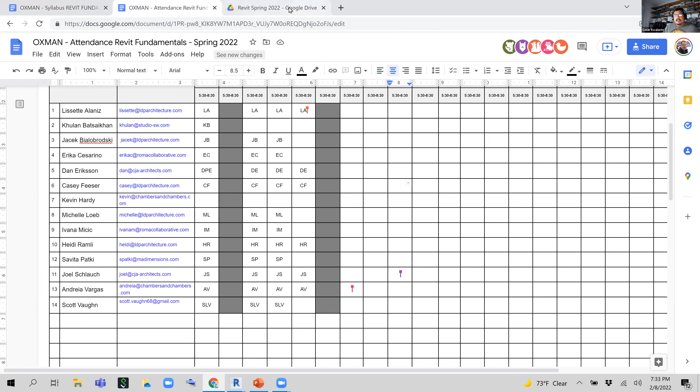Today we are going to use the data set that we left last time. I'm not sure if you were able to finish, but to give everyone the same starting point, you can go into the Google Drive, I placed a copy of the data set I created last time, called Mylla_Hytt_start2. I'm going to get the link here and post it on the chat panel. If you finished, you can continue with what you had last week, so no need to download if you were at the same point as myself.

But if you were not able to complete the massing, you could just grab the file and be at the same start point as me. This is where we left last time. We created the two conceptual representations of mass, and we called this an in-place family. In-place families are content that is created on the fly inside a project. And we created this envelope representation of the house.

You don't have to do this, but I'm just going to review this very quickly, the process again. I think as a homework, we have to create the second half of this. In the conceptual modeling, the conceptual mass is something that you create as a model in place. When you do that, you can also pick a category, which is the list of properties that you can assign to the object. I'm going to call this West.

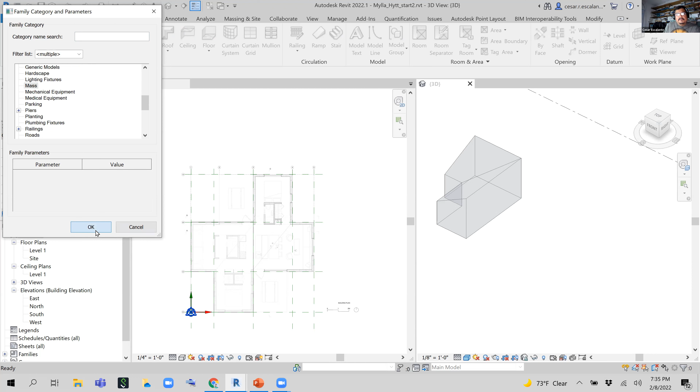That's just a category, mass. And the name of this mass is the west massing, east massing.

And again, this is how we finished last class. We are in the massing editing environment. The only way to get out of the massing editing environment is if we click this green checkbox or the red cross here.

Use the line tool to create a boundary of connected lines. Using the floor plan, I'm just going to snap to all the intersections. These intersections are the result of having working planes. When my loop is closed, I switch to the 3D view, then I hit escape. This stops placing boundary lines.

Then I select the area in 3D view and extrude it. I hit the white space to cancel, or you can just hit escape. Then I select the top face to start modifying the dimensions. I think this was 16.

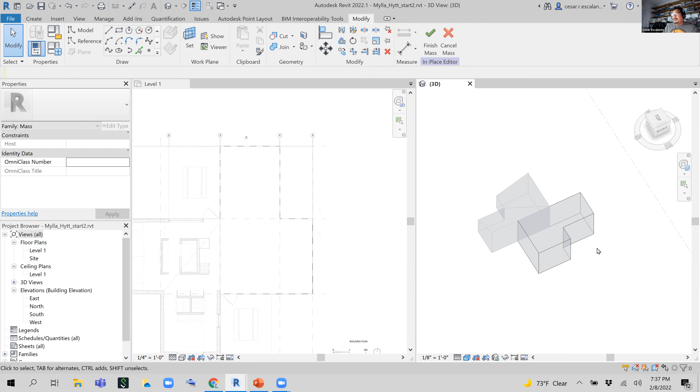In the conceptual environment, when you create a mass, you have the ability to select different elements about that mass. You can select edges - you see how I'm hovering over edges and they pre-highlight. You can select faces, a flat geometry, or you can select vertices. And what I did is select one of the edges and resize its location relative to the ground level to 9'4". In Revit, we don't have to type the feet character nor the inch character.

And then I hover over the vertice, and that vertice, I also relocate its height using these temporary dimensions. I also make it match 9'4". And when you're done, you click the finish mass, and that's where we're at.

Do we have to have massing for every conceptual house? No, we don't have to.

I chose doing this method because the way I'm going to create walls, roof, and floors is using mass-derived objects, and this is one method of creating these assemblies. But having an overall massing usually helps with some kind of analytical tools that focus on energy transfer and energy calculations. Your Title 24, for example, does not read the Revit geometry as you created it - it reads massing geometry. So when we export models, it's good to have a massing geometry so that we can work with and export to other types of analytical tools.

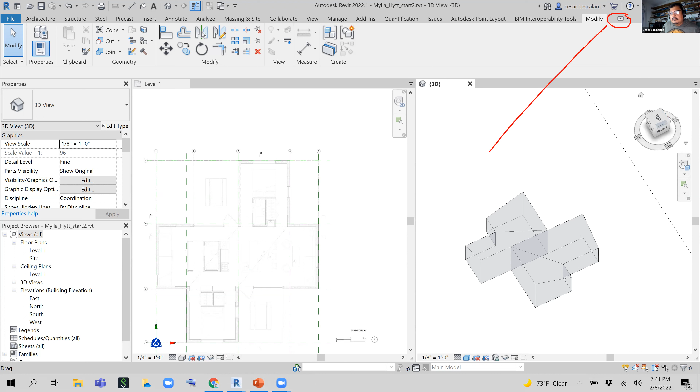Thanks for pointing that out. I'm glad you brought that up, because this may happen to anyone. I know what's happening. The ribbon has the ability to cycle across different ways of representation. If you look closely at this icon right here, next to the modify button, there's a little oval with an arrow pointing up. If you click on that, you can cycle between displaying panels, panel names, or not displaying the ribbon at all, and then display the full ribbon. So when we click the modify button, it's very easy to click this little arrow and inadvertently change the representation.

Is that what happened to you? Yes, now I can see. Yes, okay.

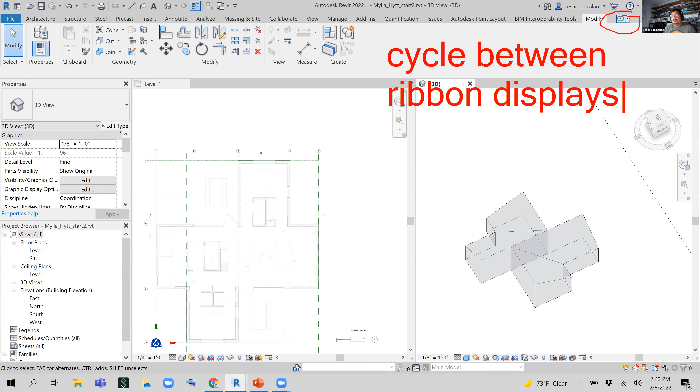Again, use this button to cycle between ribbon displays, and it could happen to anyone very easily. So if suddenly you don't see the ribbon or something's weird, just remember that little icon, that arrow pointing up in the lower, on the far right side.

Okay, thank you. Yeah, now I can see. Now I can follow you. I was like, oh my God, I cannot do anything here.

Okay, thanks. Okay, the other thing that may happen, and I'm going to describe this condition as being caught on sketch mode, trapped on sketch mode.

So a sketch mode is a temporary display in which Revit asks the user to do a certain type of operations. A sketch mode is just a way to create boundaries. And then when the boundaries are completed, we need to leave sketch mode. Usually, the only way to get out of sketch mode is to click the green arrow or the red cross.

So that's this condition. Like if I'm in the middle of creating a collection of boundary lines, and I finish, I must click the green checkbox to get out of this temporary display. And so if we don't do that and we jump to another tab, everything's going to be grayed out.

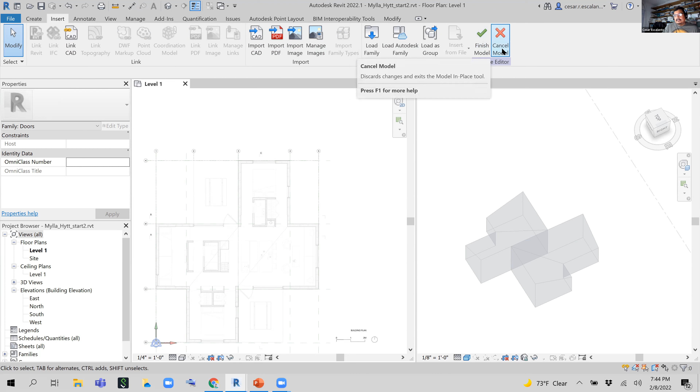And so you say, what happened with the user interface? What Cesar is showing is not what I match. The reason this is different is because I'm still inside the editing mode. In order to get out of that, I have to either cancel or finish the model. I'm going to cancel because I didn't create anything. And notice how I'm back to my full working user interface.

The same is true for, let's say, a floor. And we're going to work on floors in a bit. When I create a floor, this is sketch mode. And Revit is asking me to create a set of boundaries. But if I ignore that, I'm in the middle of editing and I go to the architectural tab, notice how everything is grayed out. If I go to the structural tab, everything is grayed out. If I go to the manage tab, everything is grayed out. And notice how there is this green undertone and a contextual tab.

While we are working in Revit, let's make sure that we don't get trapped in sketch mode. So this is trapped in sketch mode: just not being aware that you are in the middle of a sketch operation, and the only way to get out of this is by clicking the green arrow or the red cross.

Okay, everybody got the file, right? Let's see on the chat.

So Savita is asking, how do we make the views? Who wants to answer that question? How can I have two viewports next to each other? You click WT. WT, correct. You just type WT. So open the two views. I open level 1, and then I open the 3D view. And then there are tabs right now. And then to tile them next to each other, WT. Now it switched the location, but that's fine. Did that work? Okay. All right.

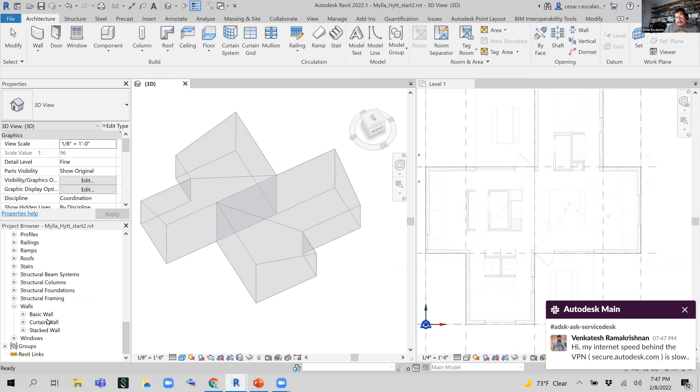There are 3 types of wall families: basic walls, curtain walls, and stacked walls. And then all these different wall types that you find in this project are provided by the project. You're not necessarily going to find these in every Revit project. It depends on how your company builds your template. Some companies decide to erase, to keep it clean.

Some companies decide to include the top 10 frequently used interior partition types. Some companies decide to build their entire collection of walls inside the template. So the variety of wall definitions inside the wall category varies depending on what template you use to get started. The out-of-the-box template comes with at least generic walls, interior walls, and exterior walls.

So let's build a wall in floor plan. Let's just pick a place on the south side. To create a new wall, you go into the architectural tab.

And then hit the wall tool. Just hit the wall on top of it. And you see, I am in sketch mode, or I'm in a temporary tab. You can tell I'm in a temporary tab because you have a green background, and you also have a tab that appears in the upper right side that says Modify | Place Wall. This is a contextual tab.

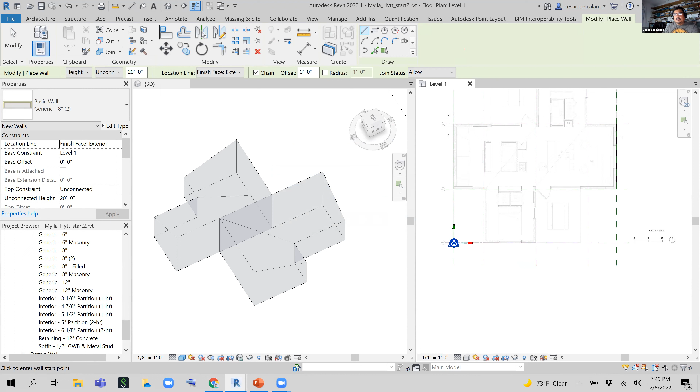So let's call this thing properly. This is a contextual tab, which are tabs that are command dependent. There are a lot of different contextual tabs. If you create a ceiling, you get a ceiling contextual tab. If you create a structural column, you have a structural column contextual tab.

The contextual tabs are ways to minimize the user interface to be a little bit more efficient, and they present you with enhanced controls to modify and create that specific command. So the contextual tab in Modify | Place Wall, these are ways to edit, create, and manipulate any created wall. So the contextual tab appears, and then in the properties, you are presented with all the different types of families that you can create using the wall command.

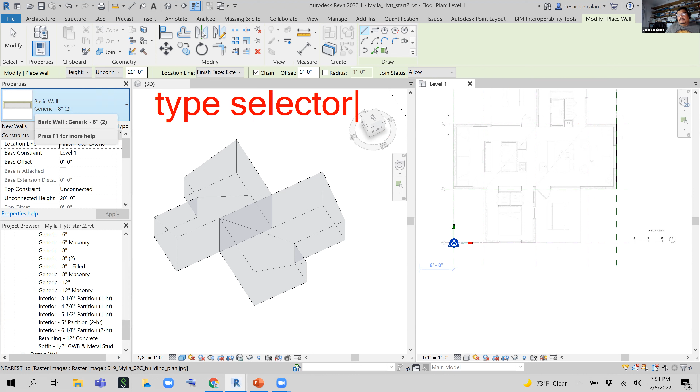And this is another part of the interface everybody must remember. This is called the type selector. So when I say type selector, always look at the upper side of the properties window. And the type selector is a way to shift options in the creation of a specific category. So I only have here element types that are part of the wall category.

There's nothing else here. If I'm in the middle of creating a floor, then I'm going to see all the floors available to me in the type selector. If I'm creating furniture, then I'm going to see all the furniture available to me in the type selector. And the type selector is also a way to swap a selected object from one family type to another family type. Okay, so when I create a wall, I pick in the type selector the wall I want. So I'm just going to pick, let's say, a generic 6 inches.

And then the contextual tab also presents you with a set of options. These guys. This is called the options bar. And the options bar, these are things you always need to look at when you're in the middle of creating an element in Revit. You need to look at the options that are going to impact the geometry. And so there's a different options bar for different tools.

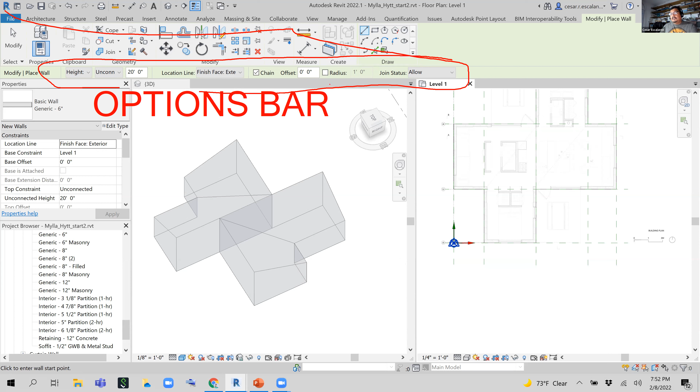And so when I create a wall, I need to understand its height, whether it's going to be connected with levels or not. It displays a location line, it displays an offset, a radius, and a join status. So let's build one wall, and then I'm going to go through these different choices. So when you create a wall, it's a 2-click operation. You start from the left, another to the right.

And then as you create more walls, notice that Revit is still remembering the wall command, and then you keep clicking and you can start creating a chain of walls. You can also close the loop. To stop walls from getting created, you hit escape. And to exit the wall command, you click escape again. And so in order to exit the wall command, you need to click escape twice. The first one is to stop placement, and the second one is to exit the command.

Again, I'm going to delete this and do it again. Wall, first click, second click, and then just keep creating a loop of walls. And then escape to exit the creation mode. So let's get a little more granular on the properties. When I create a wall, notice that Revit automatically displays for me 2 things. It displays a temporary dimension indicating the length of a wall.

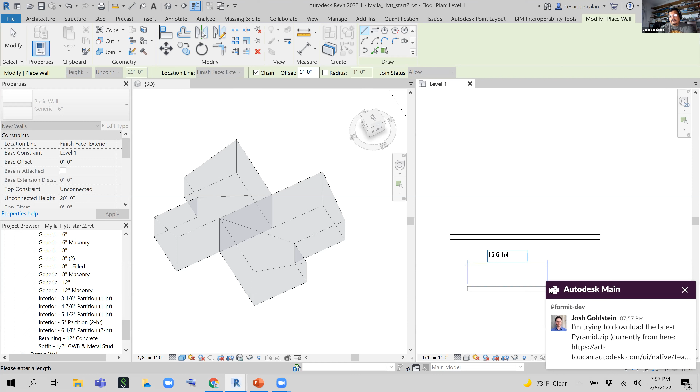You can include inches or fractions of an inch. Let me show you how. You create a wall here, and then you can type, let's say, 15 6 1/4. So on the fly, there's no command bar where you can see what you type. You have to type on the fly. So it's 15 space 6 1/4. And then you hit enter, and that's a 15' 6 1/4" wall. Escape.

You can also enter just inches. If you want a wall that is 30 inches in length, just start the wall and then type 30. But here you have to type the inch character.

You can also do math. Oh, you have to start with equal. Let me start this again. You type equal 30 plus 2, and that gave me a wall that is 32.

Sometimes we use this mental math in order to understand what it is. So again, you start the wall, and if you want to use a formula, place the equal sign, and then you go 30 minus 5 plus 2 plus 0.25. And then Revit does the whole formula for you. So these are different ways to control the length of a wall in a floor plan.

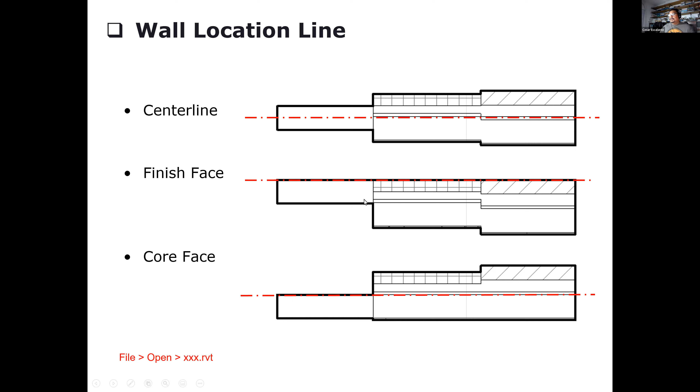So when I'm creating walls in Revit, I need to be mindful of the location line, and that is in the options bar. These are all the different options: center line, core center line, finish face exterior, finish face interior, core face interior, core face exterior. I'm going to do finish face exterior. First click, second click, escape, escape.

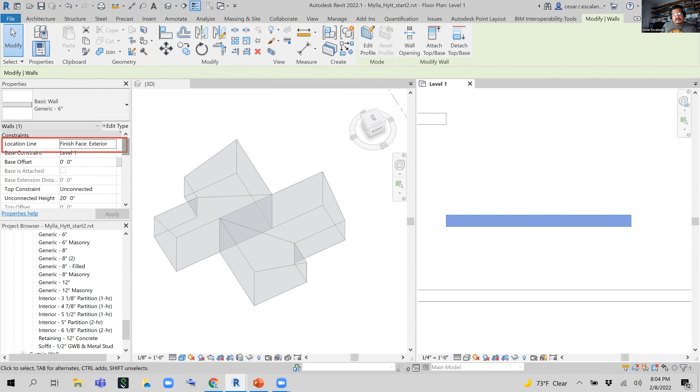The location line is something you can disclose in the properties of a wall. It's right here, location line. In a floor plan, the location line is defined by these blue grips that you see. So you can find the location line by looking at the properties, or by looking at where those grips are. I'm going to change the location line of this wall from finish face to wall center, and notice now how the grip is at the center.

I'm going to change the location line to the finish face interior. And notice now how the grips are also shifting in location. It's a visual way to communicate where that location line is. And when I hit the double arrow, the flip control, the walls are going to mirror using the location line as the axis of reflection, the axis of the mirror.

Does that make sense? So if the location line is at the center line, you might not see any shift in the geometry. I am flipping this from one side to another. I don't see any shift in the wall. So if you're building, let's say, exterior walls and you want to absolutely make sure that your facade doesn't overlap the allowable limit, then you may want to use exterior face as your anchor point. And then the wall can grow towards the interior in any size, but you're not risking your project. All right, that's the location line.

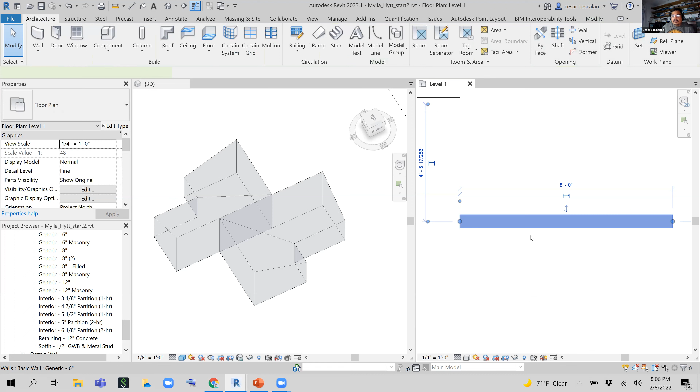Another thing you will see is that you can drag the ends of a wall. If you hit on the grip of a wall, you're gonna stretch it. Stretch it in, stretch it out. These are ways to change and modify the wall. I'm going to delete everything I have here, because I want to show you now how to create loops of walls with the similar shape.

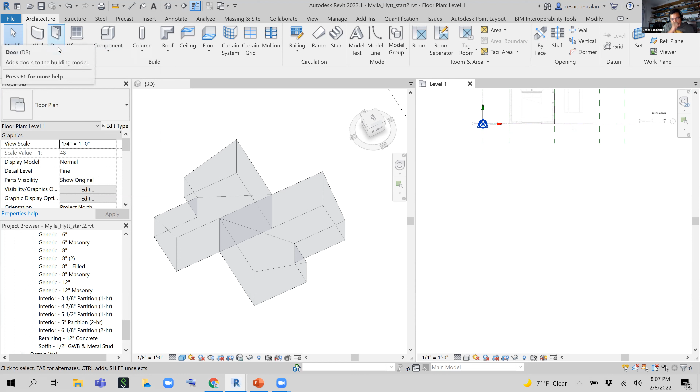So how do we create an arc wall? Well, we use draw lines, and the draw lines give me different options to draw walls that are not orthogonal. So hit the wall tool, and the contextual tab is going to display the draw tools. Here you can create line-based walls. You can create rectangular walls, circular walls. You can create polygons, either inscribed or circumscribed. You can create start-end-radius.

You can also create center ends arc, tangent end arc, fillet arc, pick lines, partial ellipse. So all these are different ways of creating different shapes of walls. The rectangle one is the easiest one. You want to try it, just hit the rectangle tool. And this is a quick, easy way of creating an office or a room.

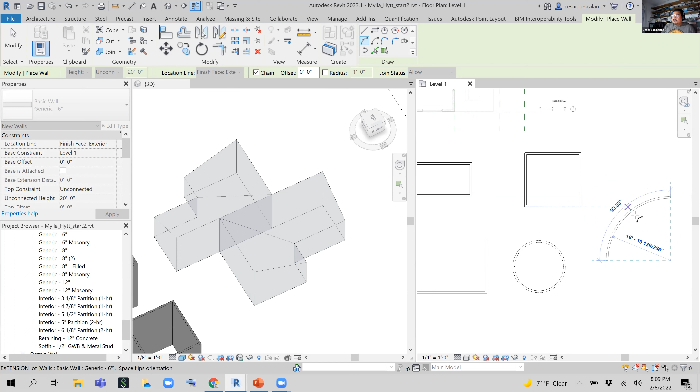You can also create a circular wall. Or you have these two methods of creating an arc wall. The start-end-radius. The first click is the first point of an arc. The second click is the end point of an arc. And then you define the radius. You can define the radius intuitively, like I'm doing right now, or you can just type the value of the radius afterwards. Select the wall, hit the radius temporary dimension, and change this to 20, and then it will change the wall for you.

You can also create polygonal walls by defining the radius of a circle. Let's do that very quick. Like if I want to create a hexagon of walls, just hit the inscribed polygon option, hit a point on the screen, and start creating and define the radius of a circle. And these, I have 4, 5, 6, and then that increase. We can also change the number of sides. I want something that is 10 sides. That's a 10-side wall. You can also create elliptical walls.

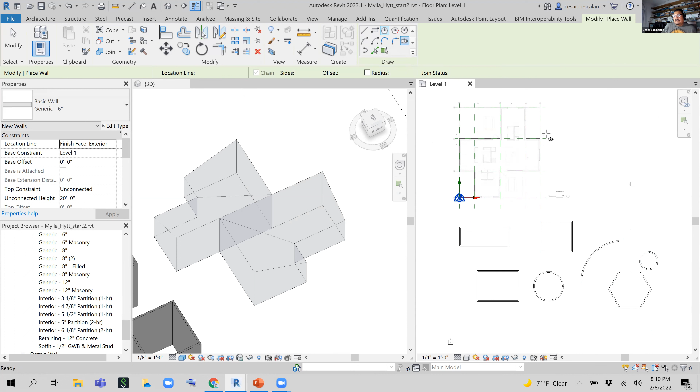This is rare, but sometimes you can create elliptical walls for feature spaces or conference rooms, or to create the Oval Office. So you create an ellipse, you define the long axis and then a point in the short axis, and that is an ellipse. All right, so I created a bunch of different walls in the south side of my project. Just as a placeholder, I'm going to delete everything. It's just so that we have a little fun in our playground.

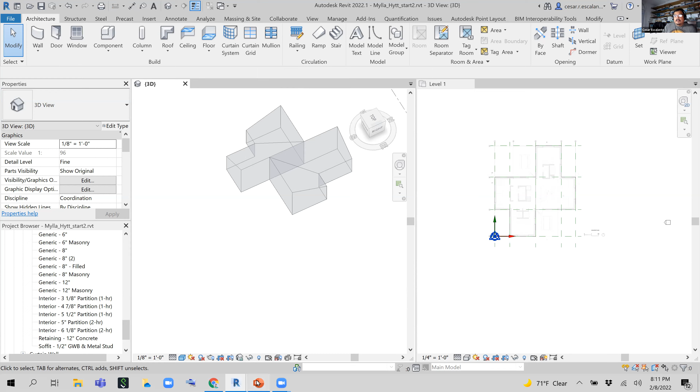All right, there's another method of creating walls, and this is using the wall by face. Well, before we get to that, let me show you what is a compound wall. A compound wall is an assembly made of walls with multiple types of layers. And as users, we have the ability to create a wall assembly that's a combination of structural layers, finish layers, and

insulation layers. When we create a wall from scratch, we usually start with a generic one, a wall that doesn't have any different type of layering information. But then we can get a little bit more complex by adding layer thickness, layer material, and performance type, or what is the function of that wall, of that layer. And so when we have a wall, and again, I'm going to do a generic one, you can access the internal properties of the wall if you look at the type properties. Type properties are right here, remember.

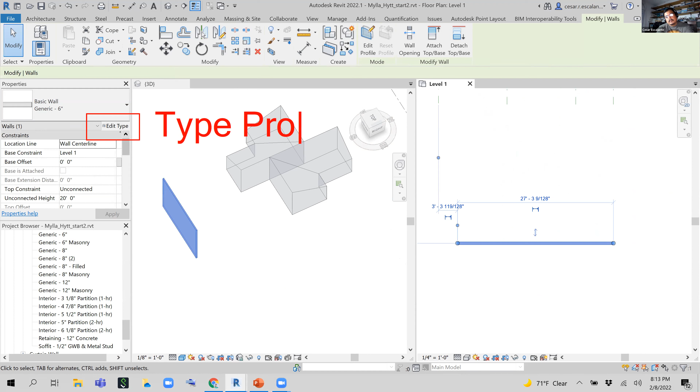And this is going to be on the test. What is type properties? Are properties that are common across all elements of the same type. And if you change a type property, you change them for all the geometries that are existing in the project that are of the same type.

So when I edit the type properties, you see this type properties dialog box. And again, these are walls. And remember, this is the way to find if something is a system family or a component family. And it just tells you this is a system family. And what that means, you cannot save it as an external file.

This is the type called 6 inches. And if you click this drop-down list, these are all the list of types available in the project. These are the type parameters grouped by functions. And if I want to create a new type based on an existing one, we need to follow a very simple rule. And this is important, so I'm going to type it.

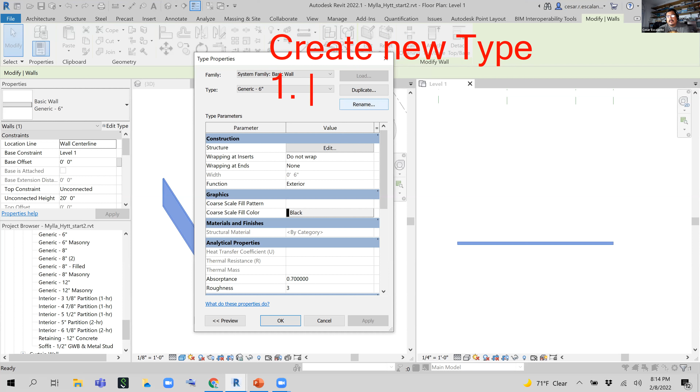This is create new types. Step number 1, duplicate a type. Step number 2, rename it. And step number 3, change parameter values. It's important to create new types so that we don't affect or impact the definition of something that's already existing in the project.

And so if I want to create a new wall type based on an existing one, we start with a placeholder. In this case, my placeholder is the generic 6 inches. Then I edit the type. And then apply the 3 rules. Duplicate it, rule number 1. Rename it, rule number 2. I'm going to call this custom wall. And rule number 3, change parameter values.

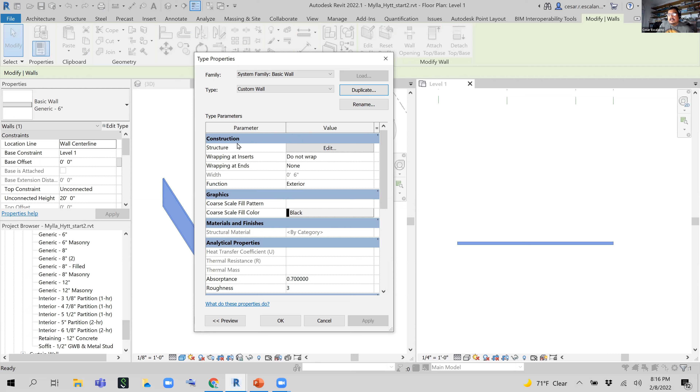So I can start editing the values of this wall type without impacting the one that's already living in the project. So let's open the structure edit button. And so don't be scared. This is a tabular representation of wall layers and wall properties.

And so right now, this wall is made of a single layer that is 6 inches in thickness. That layer plays the role of a structural material. It has a structural function, and it doesn't have any material. The material is defined by category.

Okay, so I'm going to select this wall, and then I'm going to edit the type, and I'm going to duplicate it. No, I'm going to select this wall, and I'm going to swap the type. So let's pick one of the more sophisticated ones here. Let's use this exterior brick on metal stud. And notice how now the wall starts to project some internal layers.

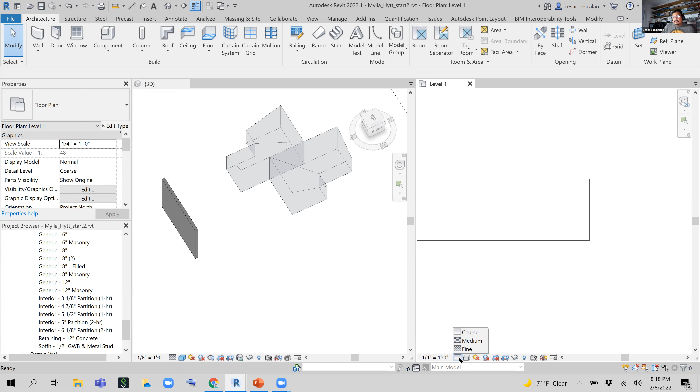And the layers inside a wall can be switched on and off using this coarse view. So if I switch the property to coarse, you don't see anything. And this is a good wall representation for overall floor plans, right? If we're doing detailing or we're doing wall sections, then we want to disclose the layers by swapping this control to fine. And then when this is fine, it will expose all the internal layers.

So I'm going to leave it as fine. Detail level, I'm going to leave it as fine. So just select the wall. No, select the view. This is a property of the view. And then select fine. To access the internal configuration of this wall, edit the type. And then in the structure, hit the edit button.

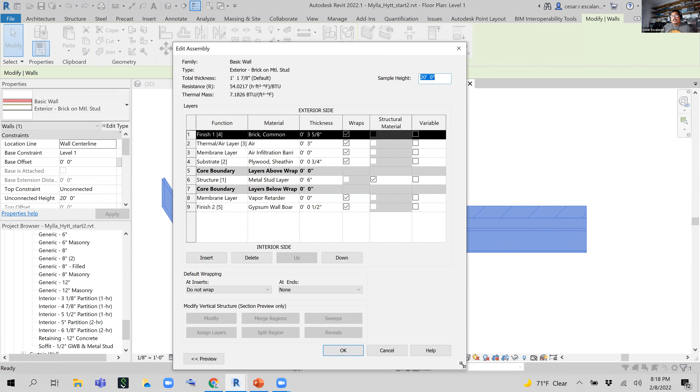And this is a little more complex than the previous one, right? So let me explain what this means. This is a display of layers from the exterior side to the interior side. And you can see that it says exterior here and it says interior here. So on floor plan, I'm going to find the double arrow on the exterior side. Then these layers are sorted by number, layer 1, 2, 3, 4, 5.

That's the first column. Then we have another one called function, another one called material, another called thickness, and then another column that's called wrap, whether it's a structural material and whether it has variable thickness. The easiest column to understand is the thickness. That's the total thickness per specification. The other one that's easy to understand is what is the material.

We haven't talked about materials, but know that if you hit the material cell and you hit those 3 little dots on the right side of the material cell, you can launch the material library, which displays the list of materials available in the project. I'm going to have a full class dedicated to materials, so don't worry about that now.

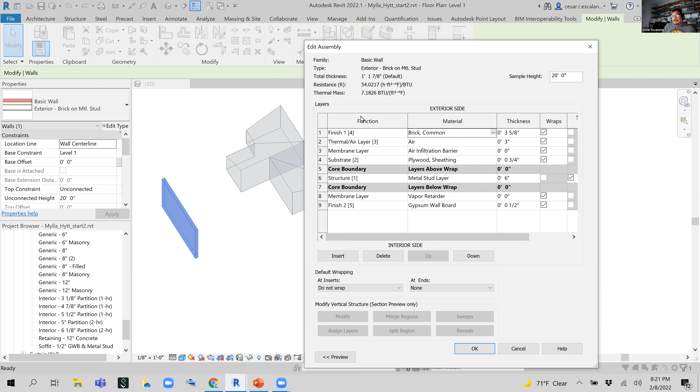These different functions, if you hit the function cell, you can swap the function by choosing another option in this drop-down menu. But notice there is also a number in brackets. This number here is called the priority number.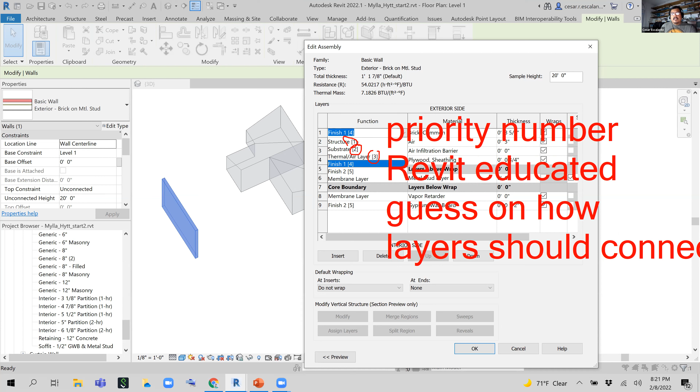And the priority number is Revit's educated guess. It's not always perfect on how layers should connect. Let me show you that in this slide. So in addition to the function of the layers, we also have priorities. And priorities are Revit's way to understand how corner conditions work.

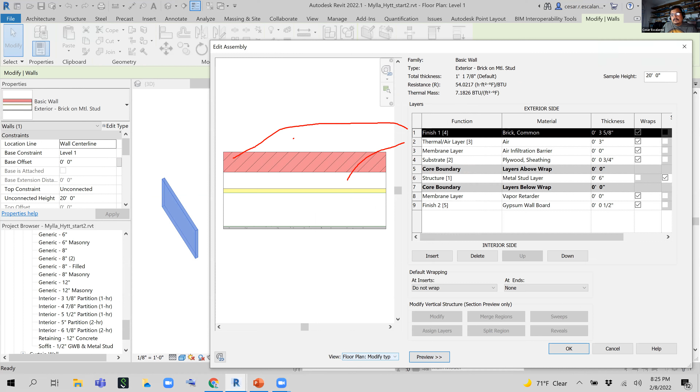So this is the finish. The thermal layer is this one. Then a membrane layer, knowing that membrane layers are like air infiltration barriers, and they are so thin that they don't need to be geometrically represented. So they have a typical thickness of 0. Whenever you use membrane layers, they have a 0 finish.

Sorry, this is the membrane layer, it's paper thin. And then I have this yellow one, that's the substrate, that is the plywood. And then row number 5 and row number 7, those are not materials, and they don't have any thickness. These are the dividers inside.

These are like ways to indicate to the user, or to Revit, that any wall that is between the layer above and the layer below is the structural core. And remember the core location line, that's how we define where the core is. So core boundary, wrap above and below, these are just visual dividers. They have nothing to do with layers. They're just visual dividers indicating that anything in between is a structural core of the building.

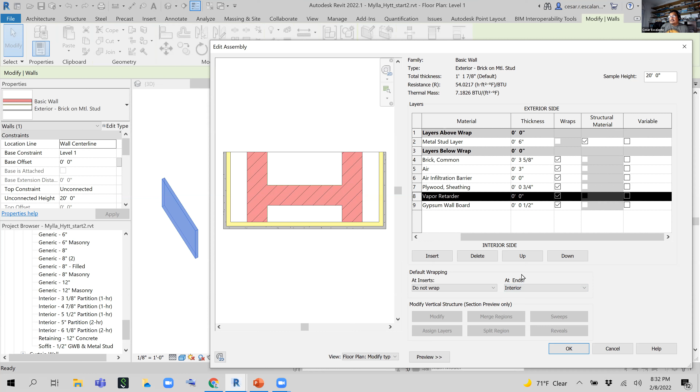So let's say this wall is going to wrap at the ends, and I'm going to do interior. What's happening is that everything that has a checkbox in this column is going to turn 90 degrees at the end cap. Obviously, that's not the way to build a wall, right? So maybe you change this to none. Or if you want to exclude certain layers, for example, I don't want the brick to turn at the ends, so I disable the ability to wrap, and then I wrap the exterior and the interior.

Interior means the interior layers, the lower ones, wrap towards the exterior one. If I do the exterior, it's the opposite. The exterior is going to the interior, but there's nothing to wrap because there's nothing above the core.

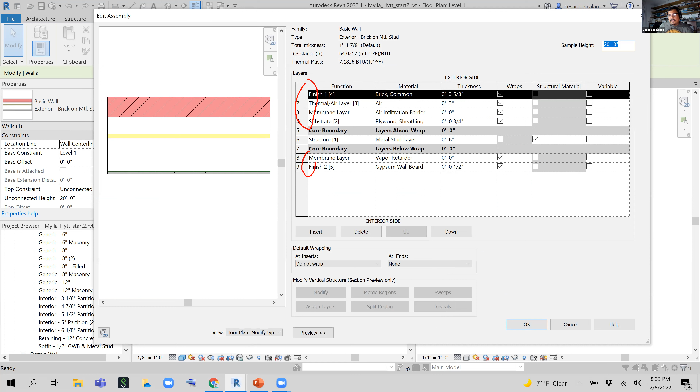So let me cancel this and go back again. I'm going to select edit the type again, and make this a little bigger again. So everything that is above the core boundary, these are the exterior layers. These are called the exterior layers. And everything that is under the core boundary, those are the interior layers. So these are this, and these guys are this.

So when I wrap and I tell Revit wrap the exterior ones, notice how the exterior layers wrap into the interior ones. Or I can do the opposite, the interior ones wrap into the exterior ones. I almost never use this, to be honest. I might use this in cases where I want to render and make sure the end caps display with the appropriate material, but for the most part, I keep this as none.

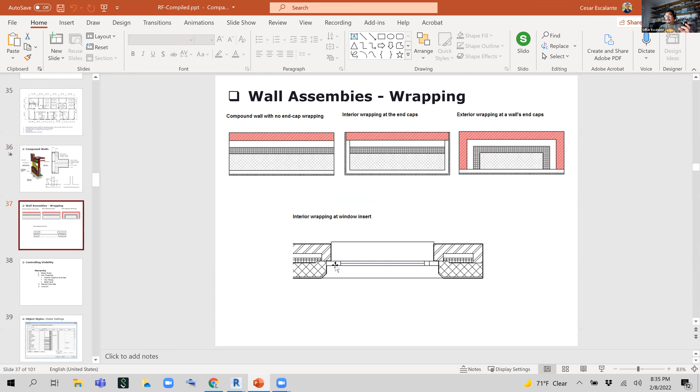The wall wrapping at inserts means the behavior that's going to happen at doors and windows. Here's an example, this is the way the layers behave at a window location. In this case, it's both, meaning that both the interior and exterior wrap and they meet at the location line of the wall. So the same thing happens here. If I select both on the inserts and place a window, I don't have a way to place a window in the preview, but both the interior and exterior are going to wrap in a window condition.

Again, this is a little more advanced, but for the most part, we don't let walls wrap, so do not wrap and do not change the wrapping at ends. I have a question, Cesar. Yeah. So does Revit assign the priority always from the core to the exterior and then comes back to the interior?

A good question. The rule of priorities is that the numbers grow from the core to the finishes in an incremental way. So you can have 1 here, the structure is always 1, and then you can grow to 2, 3, 4, but you cannot have 1, 2, 1, 3, 1. Then Revit's going to get angry. Let me show you.

If I change the priority number in a non-incremental way, I'm going to change this brick to structure, and I hit OK. Revit gets angry. It says layer function priorities: the priority numbers cannot ascend from the core boundary to the finish face.

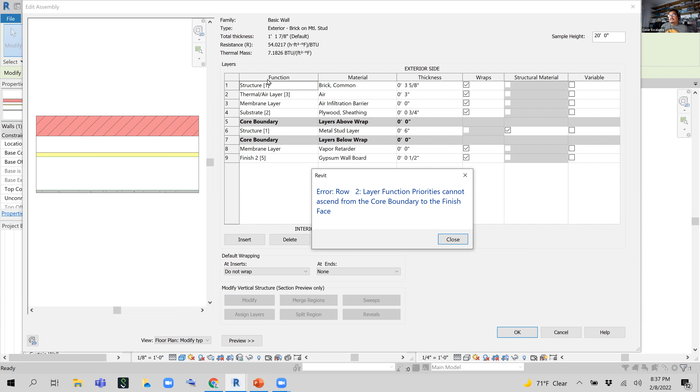So they have to go from 1 to 5, but you cannot alternate. You can also have the same value. For example, I'm going to change this to 3, and I hit OK, and it accepts it because this is the same function. But you cannot combine them - the rule is that from the core to the exterior or interior sides, it grows incrementally, but you cannot alternate them.

The other thing is that finishes have 2 priorities, 4 and 5. If the finish is the same in interior and exterior, I leave the function the same, like priority number 4 and priority number 4. If they have dissimilar finishes, like this case where I have gypsum wall on one side and brick on another, then I assign 1 to 4 and the other to 5.

The membrane layer doesn't have a priority number because it can float anywhere - it depends on what climate you are in. So I can move it up and down and it's going to work. Revit won't complain about membrane layers, just the ones that have a priority number.

Any questions about how this works?

I have a question - are the functions preset in Revit? It is preset, and I only have 5, well 6 if you consider the membrane. It's sort of a limitation, but when we export the walls to GBXML, the format used by Title 24 analysts, this matters. This is important for them, and I think these are the basic parameters of information needed to make some energy analysis. That's basically the core of it.

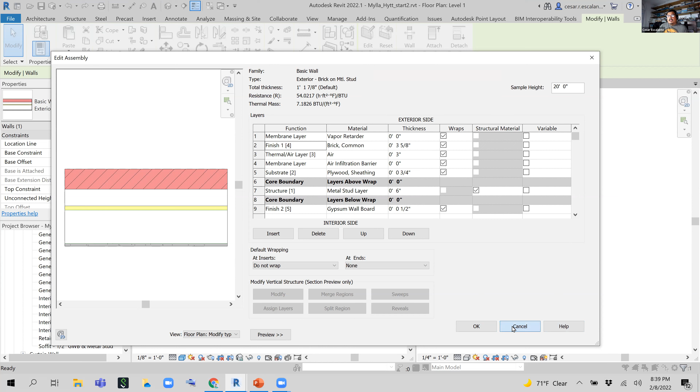Okay, I'm going to cancel here. I wanted to show you how walls work. Let's go back to Mylla. Let's see - okay, I have like 20 more minutes, 25 more. Let's do the walls and the roof and we'll be done. So if you want to watch me, okay, I don't need this wall, I'm going to delete it. This was just for a demo.

I'm going to zoom to the floor plan on my level 1. I created a wall type for you already that represents a veneer. Let me just show you that first - I'm going to create a wall here. You don't have to do this, I'm just showing you the wall type I created for you. Inside here, there is a generic.

And then that is a wall that has the following layers. It has - oh, is it this one or... yeah, I think that's the one. Okay, I'm going to select this wall and edit the type. It's called generic 8 inches 2.

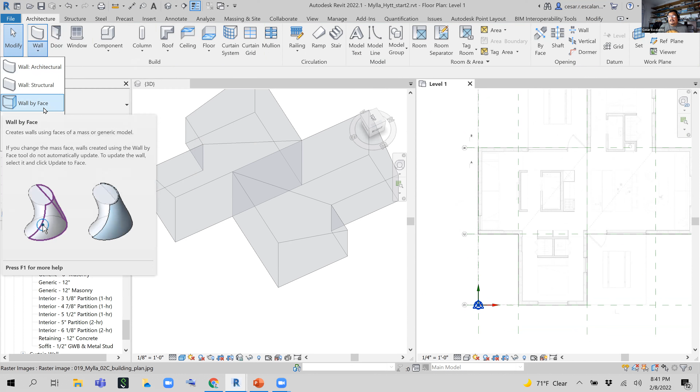All right, so we'll delete this. To create a new wall by face, you've got to hit the drop-down menu under the wall, and you're going to see wall by face. A wall by face is a way to create a wall shape based on a mass object, and this is a mass, right? So we created this object already.

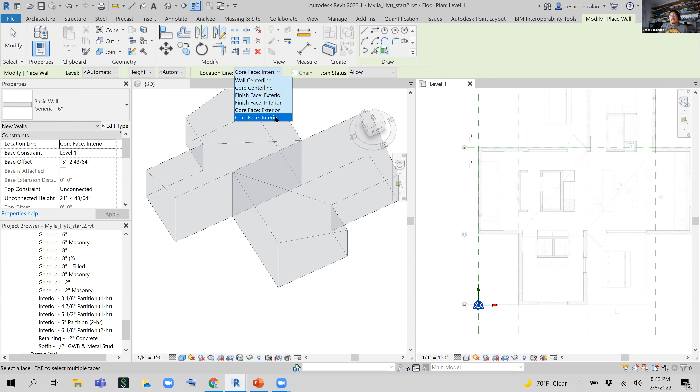So wall by face - before you click any face in the model, check the options bar, because it's important to set the location line. The location line is the way in which the wall is going to be created relative to the face of the mass. So I'm going to choose core face interior, which means the core of the wall is going to be aligned with the face of the mass, and that's because the core needs to align with the boundary of the floor.

So I'm going to do core face interior, and then I'm going to select a face.

And notice in plan how it works. So I picked the wrong one, I picked the wrong side. So I'm going to undo it. I think the one I need is the core face exterior. And then the type I'm going to choose is the generic 8 (2). That's there. And then I pick the face, and there you go. That's how my wall is working.

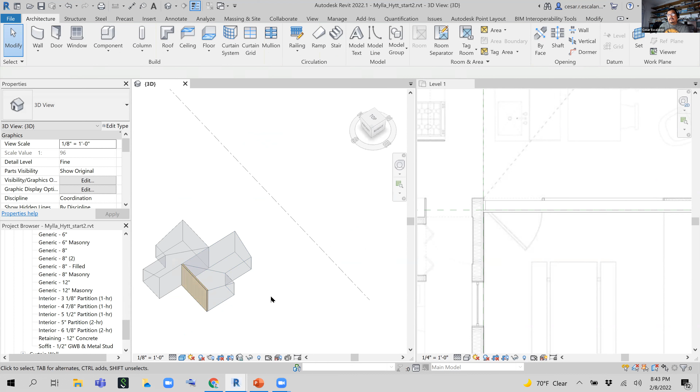And then the wall is going to inherit the shape of the mass face, and it's going to have the boundary sketch lines of that mass. And it's easier to model. You don't have to worry about the top, the bottom, etc.

So let's repeat that. I'm going to go wall, this drop down, and select wall by face. That's step number 1. Step number 2, make sure you pick the location line core face exterior to align the face of the mass with the core of the wall.

And then in the property window, pick the generic 8 with 2 in brackets and select the face of the wall, and just keep clicking. I'm going to use the shift. You can just rotate the model. You can also use the Q and keep clicking the walls to create the rest of the geometry.

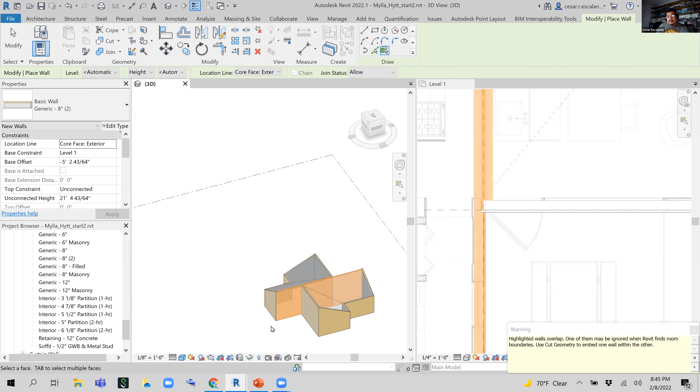Now for the demising wall right at the center, one of them is going to overlap, and that's fine. We're going to fix that. You see, it gets angry. It says it's overlapping, but we're gonna fix that. Again, what I'm doing to rotate that is to click Shift and press the mouse wheel. And then I continue clicking. Click, click, click.

And if you look at the floor plan, I want to switch this to transparent so that we can also see the image wireframe. I'm gonna focus on the detail in this corner condition. Notice how the exterior finish is outside, and the core is sitting on top of the floor slab. And that's usually how we work on this type of construction.

Okay, any question? Any hand? No. Where did you do the transparent thing? Oh, here I switched to wireframe, and that makes everything transparent. If I leave this to hidden line, it's solid.

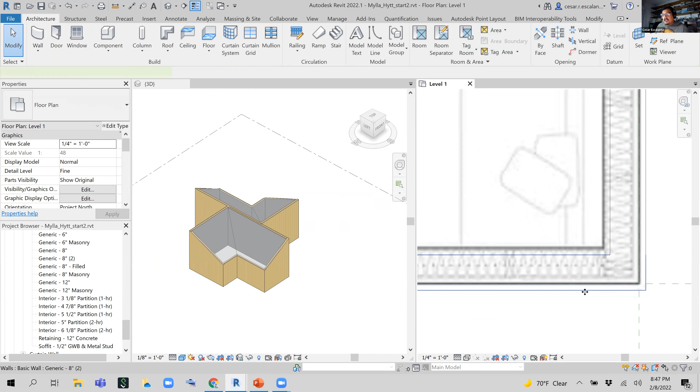Now I'm probably missing a layer for my wall type. So right now I have a core and I have an exterior finish. And if you look at the Mylla pictures, and you look at the interiors, all the interiors have this plywood applied on top of it. And so right now I only have the wood core, but I don't have the finish of an interior. So I'm going to modify the wall to include a plywood layer. So you all with me here? Did you finish doing this?

All right, so what I'm going to do now is to add a new layer to the wall type definition. I'm going to name it correctly as well. Because notice how the interior of this space has this dark color, which is just a generic representation of the core. So select a wall, one of the exterior walls, to get started. Then edit the type and click the structure edit button.

And what I need to add is a new layer in the interior side that's made of plywood, and it's going to be 1/2 inch. So I'm going to select row number 4. I'm going to insert a new layer. When you insert layers in this dialog box, it's always going to insert it up. There's no insert down, unfortunately. I wish there was. But then I'm going to use the down button to move it in place.

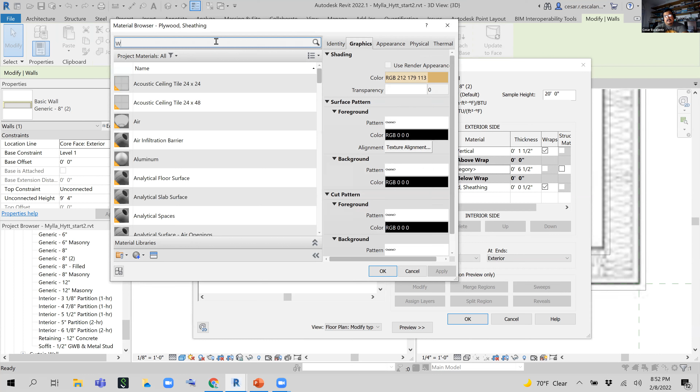And the other thing I'm going to do is in the structure; I know this is wood construction. Right now it just says by category, and that's why it has that gray color. I'm going to click on the structure and those 3 little buttons next to the structure cell, and I'm going to look for stud. You can search in the material browser in the upper left side on the search cell. You can find stud, and there's only metal stud. Let's say wood. And in wood, we have softwood lumber.

The reason it's important to define all the materials as needed, well, there are 2 reasons. First, so that it renders well. And second, it has the appropriate physical and thermal properties associated with the materials, which are important for analytical purposes. So softwood lumber has all these: specific heat, density, emissivity, permeability. Maybe this is not important for an architect, but if we're going to transfer this information to somebody else, to an energy analysis or a Title 24, they may or may not use this information, and that information is baked with the material. So I'm going to select softwood lumber, hit OK.

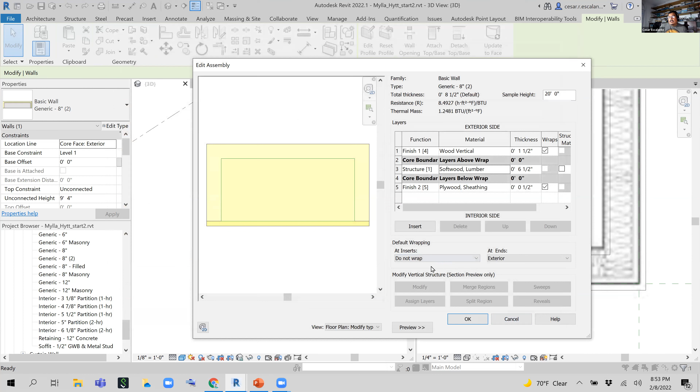And I have everything as it should be. I have a finish that is plywood sheathing, 1/2 inch, a structure that is softwood lumber, 6.5, and a finish that is wood vertical, 1.5 inches. And then hit OK, hit OK. And now the interior finish matches the image I have of the Mylla house, which has this nice finish. When I render, it's going to look like that.

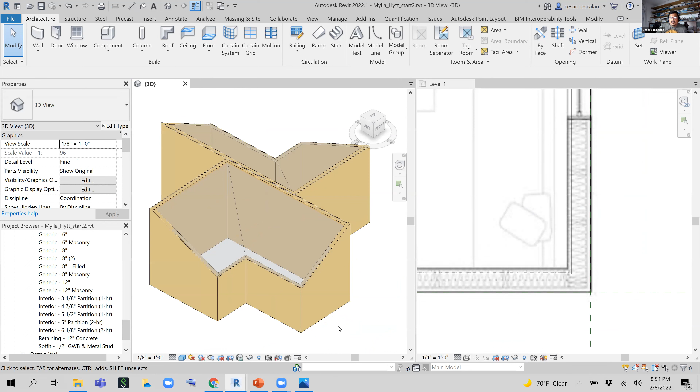Okay, another thing you should look at is these corner conditions. I think the corner at the edge is very clean. But in Revit, there's a primary wall abutting a secondary one. But that is a behavior that we can override. So if you're with me at this point, let's take care of these corner conditions. If you want to watch me first, I'm going to explain what a corner condition is, and then we'll do it together.

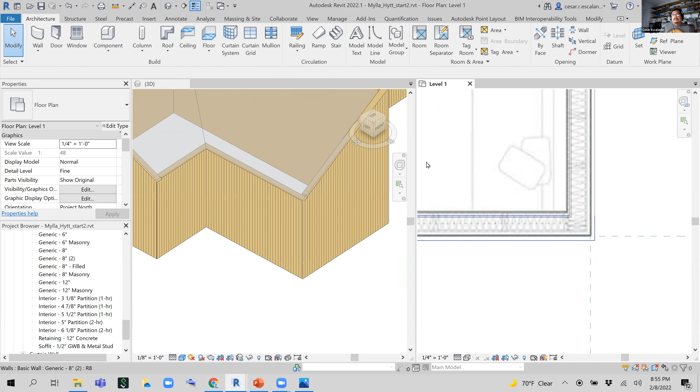In corner conditions, there's always a primary one, and then there's a secondary one. The primary is the one that takes importance in the corner condition. Like this is the important one. Let's switch this to hidden line. Okay, Revit just gives one behavior automatically. But what if I want to reverse the behavior? So what we do is we take care of corner conditions.

For corner conditions, when you select a wall, it's one of those nested commands inside the contextual tab, and it's called wall joins. Wall joins first ask you how you want to take care of a join. So you go to a corner and you see that big square, you select a corner, and then you have all these options. You can abut one wall against another one where you have the principal and the secondary. You can miter them, or you can square them off.

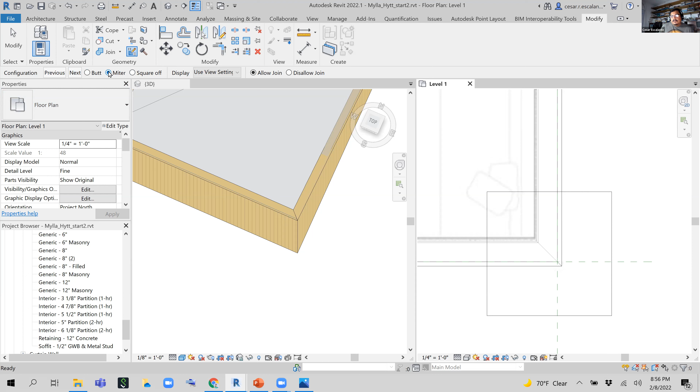And so I'm going to use the miter to fix this condition visually. Notice now that this looks much better, both in plan and in section. So all we need to do is hit the corner condition, switch to miter, and be done with it. We're going to repeat that for every corner, and then we're going to build a roof, and then we're done for today.

So we go again. I'm going to do another corner. I'm going to deal with this in 3D now. So you go to the modify tab, and then select wall joins. Select a corner, and you're going to see a big square at the ground level of the corner condition. Then pick the miter choice, and then hit escape.

And we're going to do that in every corner that we see that there's not a good connection. Here's another one. Go modify tab, wall joins, select a corner, miter. Wall joins, select miter. And details count in representation and documents. So that's why I'm doing that. I'm taking great lengths fixing how those connections work.

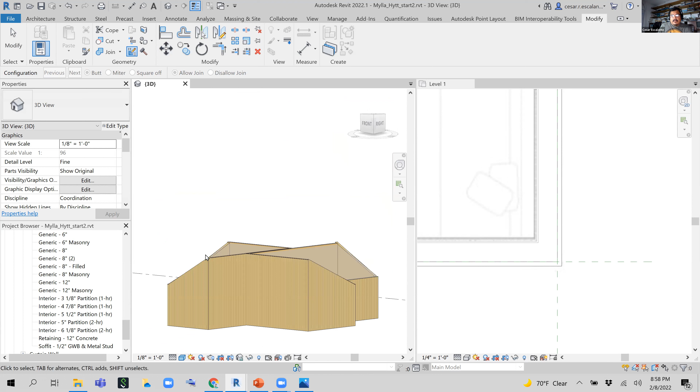Now here on the very, let me see if I can do that here as well. Yeah, I can also do it at the top here. And I can do this also on the opposite side here.

Hey, Cesar, I can't remember what it's called. They're grayed out. When I select the wall or the walls, why would they be grayed out? What was the question? Mine are grayed out when I click wall join. What is grayed out? The walls? The wall joins, the butt, miter, square off, allow join, disallow join. Oh, so modify, select this. You have to hit the corner condition, and then it's going to get enabled. Oh, okay. Hit a corner condition, and then they're going to become available. Okay.

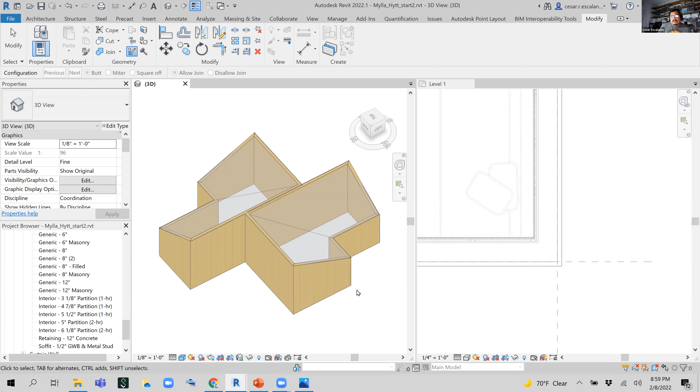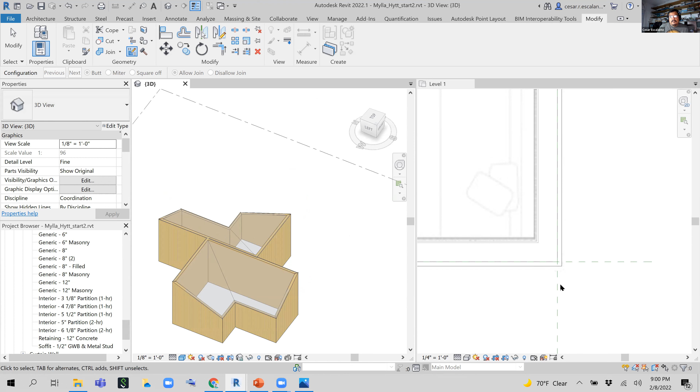So I think I just went around all the corners. And the goal is that in elevation, they look sharp and clean. I think I'm getting there to a certain point. I'll give you one more minute just to finish if you are at that point. Again, modify button, wall joins, select a join in the 3D model or in a floor plan, and hit the miter choice. Miter.

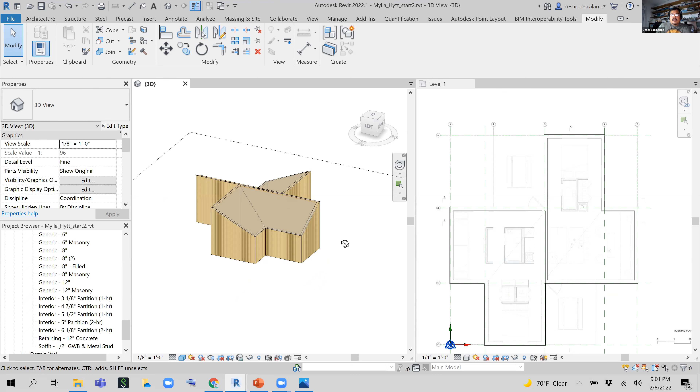So how do we clean the two that are overlapping? Oh, that's a good question. Here in the back. I don't know if I'll have time to show you today, but that's the next step. What I want to do now, before I get into it, because we all need to do it, is to show you the representation in plan. And then I'll fix that. I'll get back to that.

Okay, in plan, this is how the walls look like. But if we want to do this very graphically, like some magazines, and we want to display this wall completely black, change the detail level to coarse, and then we're going to do something to this wall so that it looks completely black. You're going to select one of those walls. We're going to access the type properties. In the property window, find the edit type button.

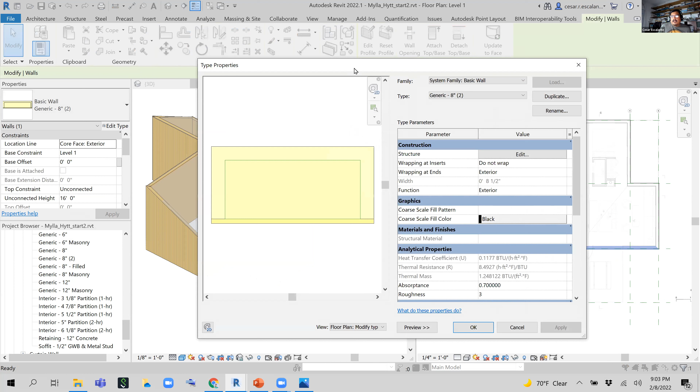And then notice that under the graphics section, there is a parameter called coarse scale fill pattern and coarse scale fill color. The fill color, I think, automatically says black, and the coarse fill pattern is what pattern you want to associate to the wall when the view is set to coarse. So when this view is set to coarse, I want this wall to display solid black. And in the cell that says fill pattern, click those three little dots in the right side cell. Select solid fill, hit OK, apply, OK. And now notice how they inherit the color based on the properties.

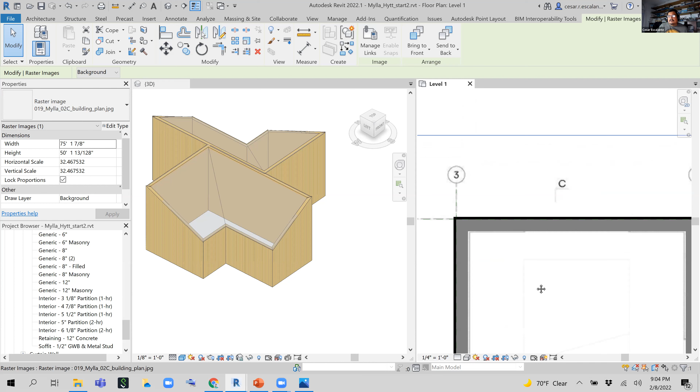But now I'm going to switch this to, why is that? Let's see. I select this wall, edit the type, solid fill, yes. Coarse view. Does it look gray on your end too? Does it look black? Yes. All black. I don't know why mine is looking like this. Maybe it's hidden line. It should look black everywhere. It might be something about my graphics. They're getting tired. Okay. All clear about how to make this.

And then if I switch this to anything but coarse, if I return this to fine, then I get the full display of all the layers. It's only when the detail level is set to coarse that this type property kicks in. The wall type property. Solid fill.

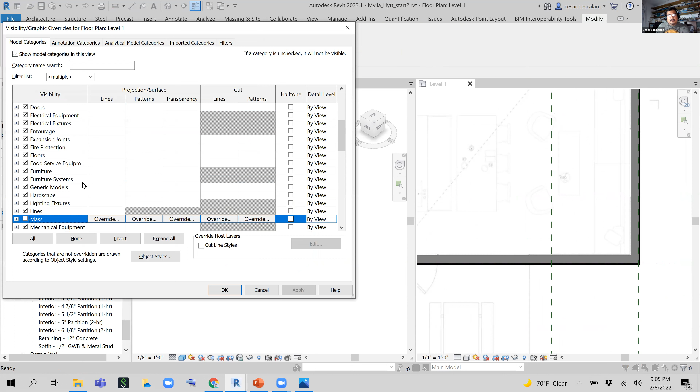Oh, you know what it is here? Maybe it's the massing. The massing is making my thing look gray. So all I need to do is switch off that category in the floor plan. So I go to visibility graphics, and then I go to the mass and switch that off. No. If I go to the view, massing, and say show mass by view settings. No. Okay, I don't know why it's looking gray on my end.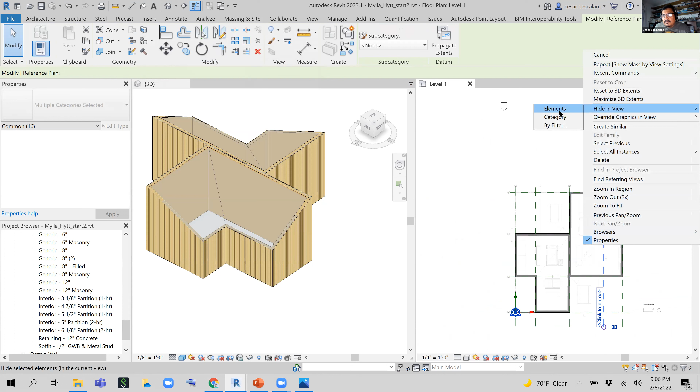See if I manually hide the mass. Hide in view elements. No. I don't know why it's looking like that. I'll search it later. And let's see.

Back to Ivana's question. How do we clean this up? So we have two overlapping walls here. What I need to do is to select each of them and override its shape. And so the way I'm going to do this is, there are two ways of doing this.

You can individually grab the end of the demise wall and stretch it. You know how I stretch it there? Select this and you can stretch it out. And there you go. So I'm going to do it again.

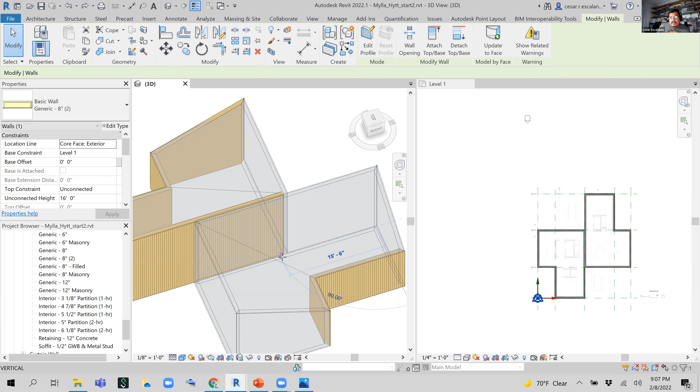Select the first demise wall, click on the wall end, and then snap it so that it touches the other wall. And then select this one and stretch it. And now I don't have that warning anymore.

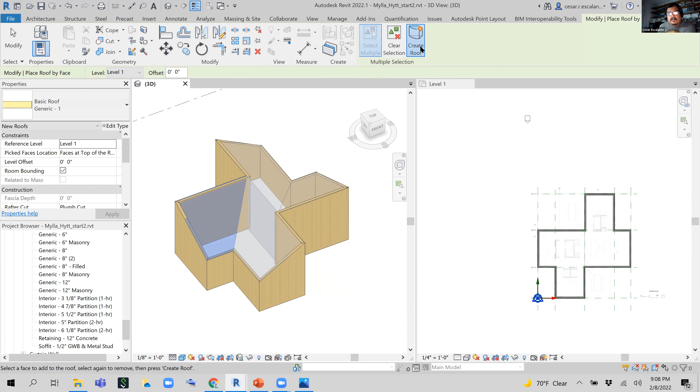Now for the roof, a roof works exactly the same as walls. You don't have to do this, but I'm going to show you first, roof by face. I select a generic roof and create a roof. This roof, when I build a section through it, doesn't look as clean as it should be.

So a strategy I use to have very, very clean sections, and by clean sections I mean that both the walls and the roof connect seamlessly in a section representation, is that I create a wall by face that behaves as a roof. There's nothing wrong about applying a wall as a roof condition, in particular if it has a very similar construction type.

So what I'm going to do here is go to the wall, and then wall by face, and then select the faces of the roof, and notice how the geometry fits perfectly around every corner. If I use the roof object, that effect is not achieved. And then I'm going to do that here as well. And then they just look like a single line.

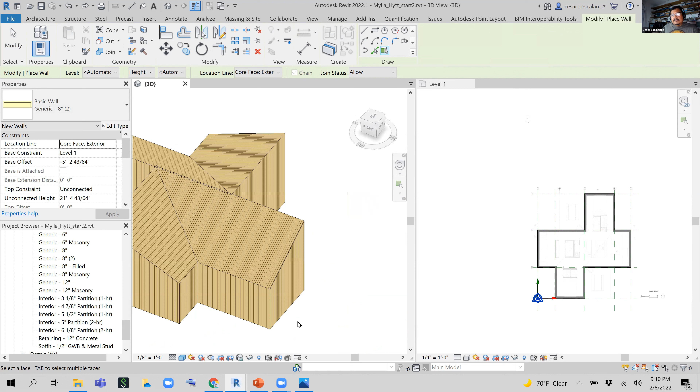And then in floor plan, I'm going to create a quick section. I'll show you how to create a section. If I build a section from here to here, looking to the left, and open it, notice how this black section in the roof and the walls is super clean. This looks like a representation in Architectural Record. They always have that look, right? Very artistic.

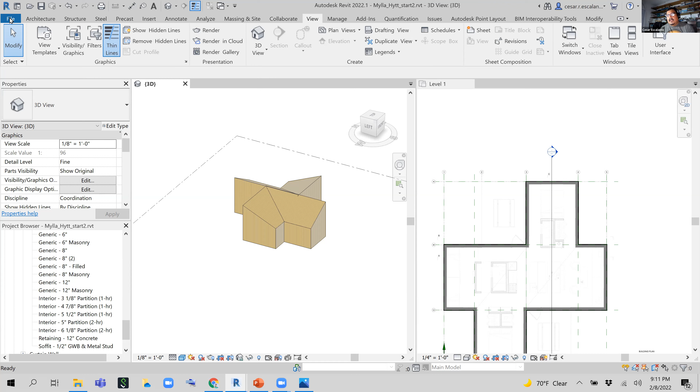Okay, so we're gonna leave it there. Save this file. I'm also gonna make a copy of this. If you fall behind, you can pick it up from there. And if you have trouble, feel free to stay with me after we close the session, and I can give you one-on-one support. Next class, we're gonna jump into the interiors, and we're gonna build the structural elements.

We're gonna build the grid system, some of the levels, the floor, and the core of these restrooms. And then the following class, we're gonna focus on the kitchen, the furniture, custom families, because a lot of the built-in cabinets you won't find as external components. You have to create some from new. And then we're gonna create a custom table from scratch.

Just to show you where we're heading, I'm going to save this and open the final. I have placed a final version of this house in the Google Drive. So if you open my drive, the spring 2022 Mylla folder, there's a version called Final. This is where we're heading. We're going to try to build this house. I have it here.

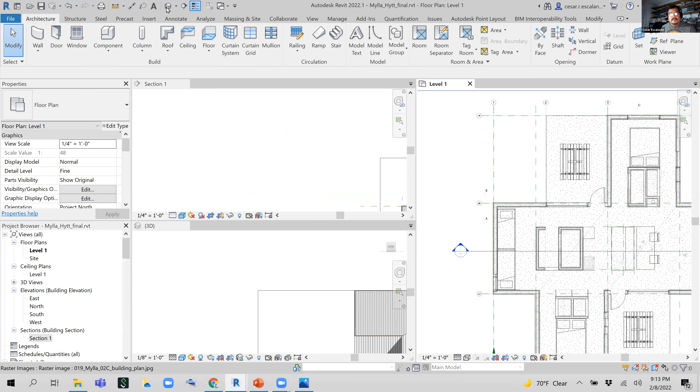Now this is the 3D view of the house, completely built, and it closely resembles the one that's in the magazine, and it has the right texture, the right size. So we're gonna focus on windows. Here is a curtain wall. But we just finished the exterior.

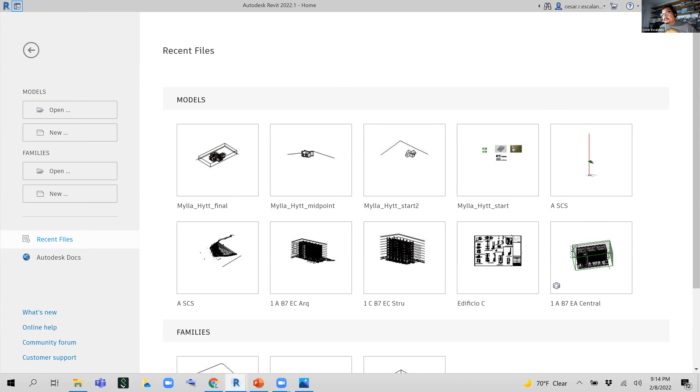Cesar, I have a quick question. My model got offset from the plan view. It looks like you can pull it around. Is there a way to snap it back where it's supposed to go? So more or less, the model doesn't align with the original floor plan.

So something like this on my screen. Let me see. I think this happened to Ivana last week. Yes, something like this. Exactly, right. Yeah, so the image got shifted inadvertently. It's not your mistake. The best you can do is select the image in the screen and use the move command.

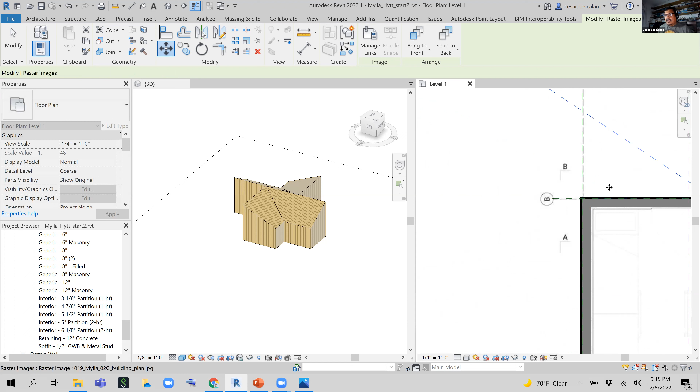The move command has this symbol in the modify panel. And then do your best to snap right at the center of center line B and A, and snap it to the grid line intersection. And now to prevent that from happening again, you can pin the image, and I should do that next time. I should direct everybody to do that.

Select the image, and there's a pin command in the modify button, and then that is not going to move by mistake. You have to unpin it in order to modify it. Does that make sense? That does, yep. Yeah, that happened to me as well. With my floor plan, move the walls.

Yeah, you can pin it, and then unfortunately, raster images don't have a snap to. You cannot snap to the bitmaps, and so it's just a guess. You do your best to move the image where it needs to be, and when it's there, pin it. The pin command anchors elements to the ground. You can unpin it again by clicking the unpin modifier, but leave it pinned. Yeah. Okay, thank you.

All right, thank you, Cesar. Okay. Anybody else need help?

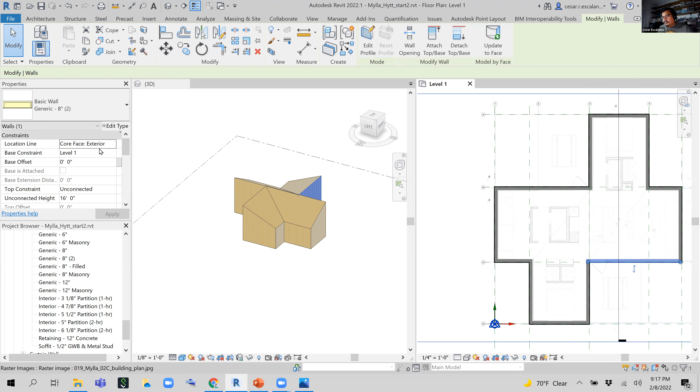I have a question. When I was drawing my walls in, they showed up outside of the plan view drawing, and I had selected core face exterior. Is there a way to modify that retroactively? All you need to do is... you selected core face interior by mistake. Is that what you did? No, I think I had core face exterior, but it's still snapped outside.

Do you have that problem right now? Yeah, do you want me to share screen? Yes. I think you have to stop sharing. Okay. Yeah.

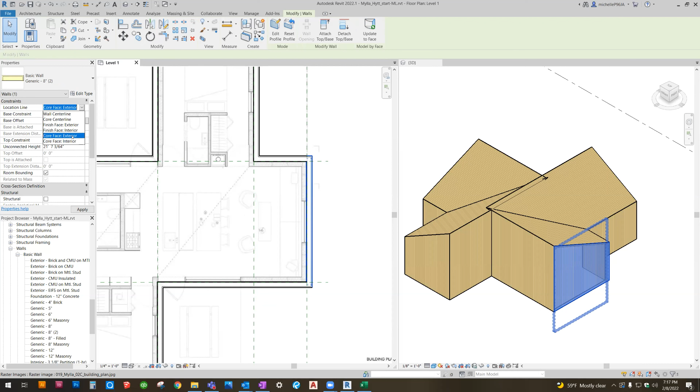So it's set to core face exterior. Yes, core face exterior. So what happened? Did you model it first as interior and then switch it to exterior? I guess I must have, yeah. So yeah, that's what happened. So you would have to drag it? No, you could... let's see. Yeah, you'll have to offset it. Use the offset command.

But honestly, it might be easier to redo it again because it's just a matter of clicking with the right location line. It's going to be a drag to do it one by one because you need to shift each of them to the left. Okay. Thank you. Sorry. Yeah, core face interior and exterior will place the wall relative to the face that you picked, and after that, when you flip the exterior control, it's a mirror, so it doesn't preserve the same location. Okay. Sorry, Michelle, you have to do it again. No problem.

The endpoint. Oops. Do you guys see my screen? Yeah. Yeah. Okay. Let me get...

Okay, here it is. So you select this wall, right? And you see the end grip of the location line. It's displayed at the lower side of this. I did it in 3D, but you can also do it in floor plan. Probably floor plan is more precise. Grab the grip and then just stretch it. But it's very easy to move towards the right or the left. If you want to keep it orthogonal, click the shift button and it's only going to move it 90 degrees.

And then you snap it to the wall, and Revit automatically is going to take care of the corner condition. And then I do the same for the other wall. Select the wall, click the grip in plan, click the shift key to drag it orthogonally, snap it to touch the wall, and Revit's going to take care of that corner. So the snap perpendicular doesn't have to be that precise. You just drag it to touch the wall, and then Revit likes to connect things together.

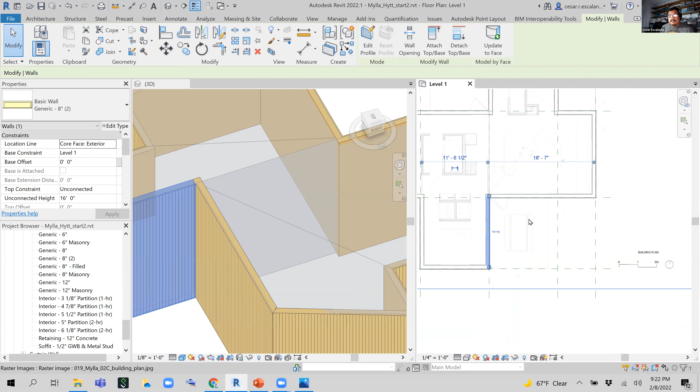Okay. Casey, I see you on the line. I don't know if you have a quick question. Nope, I was just listening. Okay. You good, Joel? I'm fine. I'm just listening. All right.